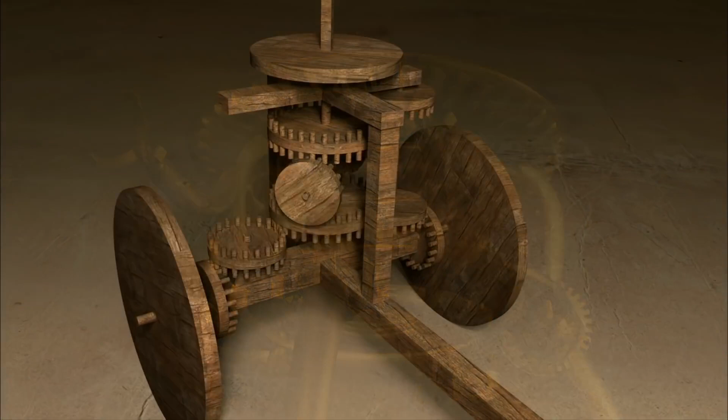Robots. The very word conjures up images of science fiction movies and visions of the future. But could the ancients have created automatic, programmable machines hundreds and even thousands of years ago? Full-size human replicants, animals that moved by themselves, sophisticated multi-action robotic chronometers over 50 feet high. Now, new evidence suggests that ancient androids may have been more reality than myth.

The most imposing legacies of the ancient world still stand today. But temples, palaces, and tombs of stone do not tell the full story of life hundreds and thousands of years ago. If we look deeper beneath the ruins, we find a world of extraordinary automated machines.

Although the ancients lacked electronics and computers, some of their automata were really surprisingly sophisticated and incorporated concepts like feedback control and programming. We are discovering that the ability to create programmable gadgets has been around for 2 millennia. There existed automated devices that were centuries ahead of their time.

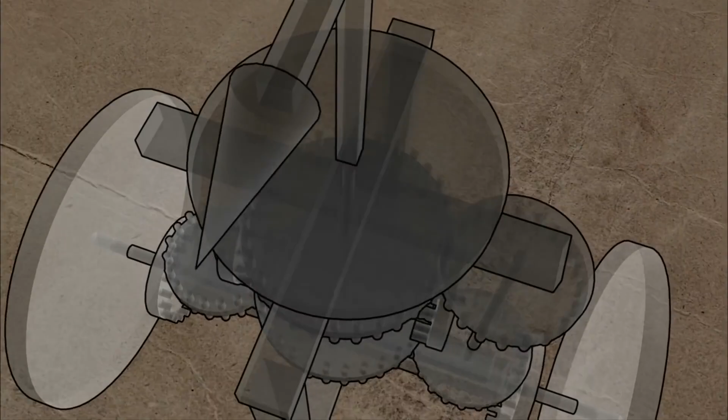And many of the breakthrough innovations gave birth to the science of robotics and to the technologies we still use in automated machines today. A lot of people think that robotics was invented at the beginning of the 20th century, but there were proto-robots around throughout the centuries for 2,000 years, and without those we wouldn't have any modern robots.

The human imagination has always dreamed of a future where we might interact with life-size human replicants. But unbelievably, this might not be a dream. Could it have happened hundreds of years ago?

Vinci is a small town nestled in the Italian hills. It might have remained an insignificant dot on the map were it not for one man, the town's most famous son, Leonardo da Vinci. Leonardo was a genius in his own time.

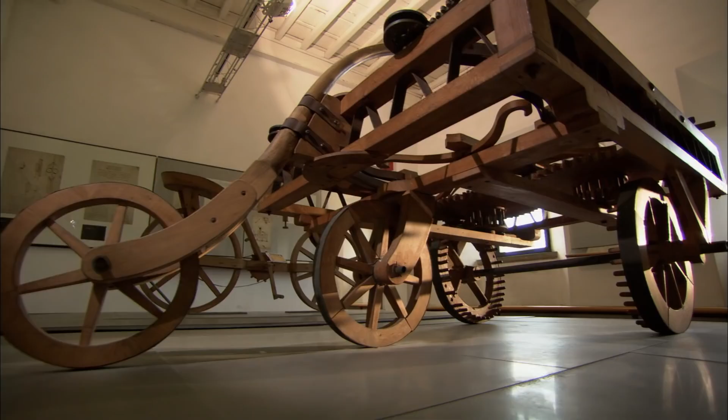He created some of the most amazing inventions one man has ever produced, and many of his concepts changed the world. The Leonardo Museum in Vinci contains models of some of the most important and fantastic inventions the world has ever seen.

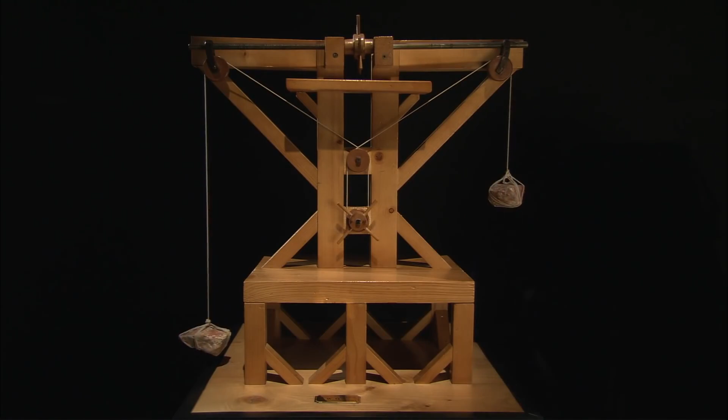Ingenious counterweight cranes, Leonardo's prototype helicopter, the first in history, strange and claw-like wing designs for futuristic flying machines, and large tanks with heavy defenses and mounted with powerful cannons 400 years before they were first used in battle. But the museum contains treasures far more valuable than the models of his creations.

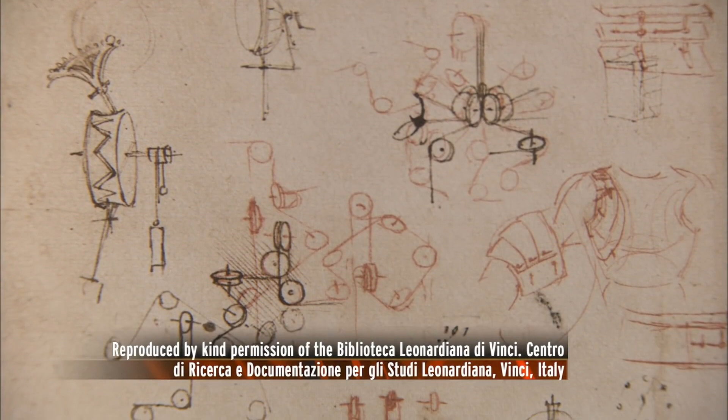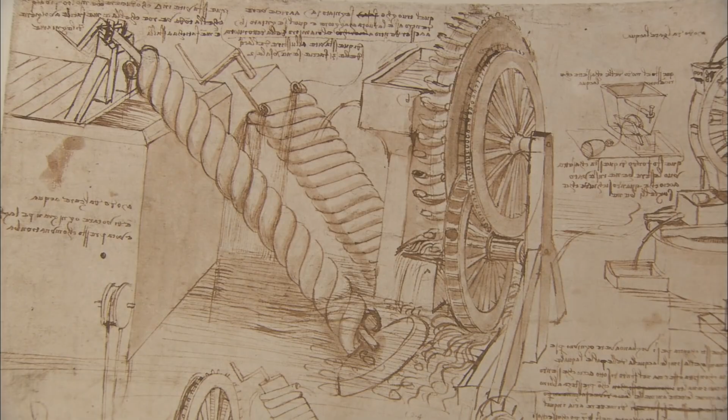The manuscripts that record the actual drawings and notes penned by the hand of Leonardo himself. The collection is known as the Codex Atlanticus. Contained within its pages are sketches and virtual blueprints for hundreds of Leonardo's inventions.

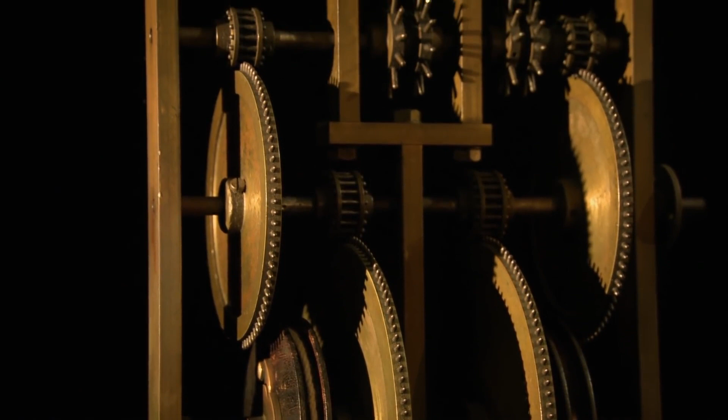Hidden among the pages of this text is an extraordinary find, one that challenges the history books. The pages describe in intriguing detail the inner workings of a fully automated android, made to look like a knight.

So now what it's left us with is having to be detectives. It's a bit like an archaeological dig. We have to go in, we have to look at the drawings over and over and over again.

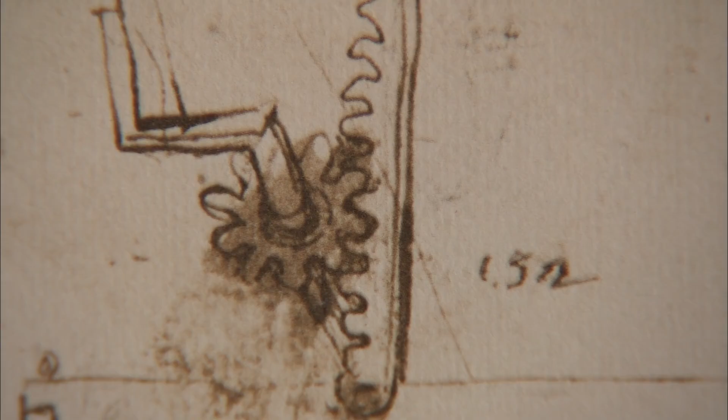Florence, Italy is where Leonardo did much of his work. Alessandra Romanelli is a curator at the Leonardo Museum in the city. It is here that robotics historians have actually reconstructed Leonardo's robot knight, based on sketches made by Leonardo himself 500 years ago. Leonardo dedicated himself to the project of an automaton, which is a humanoid machine.

Leonardo's android was designed based on an advanced knowledge of biomechanics, and that's the science of how our bodies move. He was all the time thinking about how could I make a machine that would be like a person? Leonardo's robot was designed to replicate human movement through metal.

Muscles, tendons, and ligaments were all first studied meticulously before their function was transformed into the robot's design. Leonardo thought of the human body as a wonderful, perfect machine, and he tried to create a mechanical model that could reproduce the effect of human movements.

Cogs in the chest of the robot were attached to axles that were wound with rope. As the key cogs rotated, the rope became unwound or wound tighter. The rope was attached to the limbs, and as the rope was pulled or released, the limb moved. It worked through the effect of tightening and loosening the ropes to simulate the traction and straining of limbs.

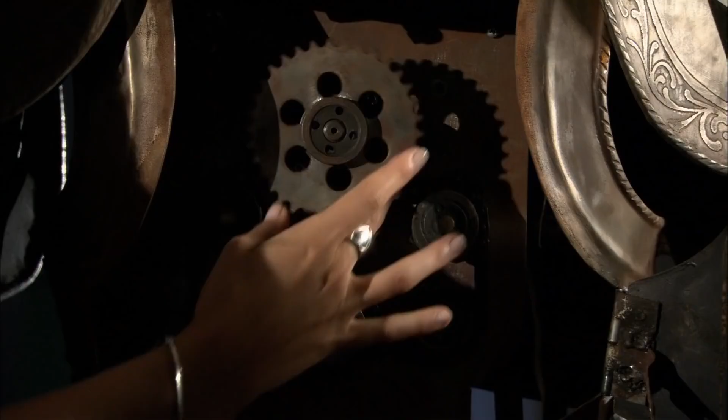Beneath the knight's armor, we can see the gears and ropes that turned to tighten and loosen the ropes attached to the arms. We can see the wheels in the robot's chest. The ropes were fed from the cogs in the chest, through the shoulder and all the way down the arms. The result was that the turning of a gear produced a movement in the limb.

This would be the movement of the arm. Put together, it produced a remarkably human result. So what the robot can do is hug someone. So they reckoned it went up to people and hugged them. The robot knight would have enthralled and entertained audiences wherever it went. But were there robots of the ancient world designed for more sinister and violent purposes?

The ancient Greeks lived in an age of myth and legends, a world populated by gods and monsters. But in ancient texts, there are stories of another kind of being - this one fully mechanical, stories of robot warriors.

Homer, the most famous of ancient poets and writer of the tale of Troy, tells us of the god Hephaestus, the Greek god of smelting and metalwork. He was the god of blacksmiths, the god of manufacturers. He was probably the first engineer ever on Earth.

Ancient texts say that Hephaestus lived high in the mountains of ancient Greece, and it was here he had his forge, where he smelted, beat, and created weapons, armor, and all things metal for the gods themselves. He was said to have produced countless ingenious mechanical devices, but intriguingly, Homer tells us that he also forged robots.

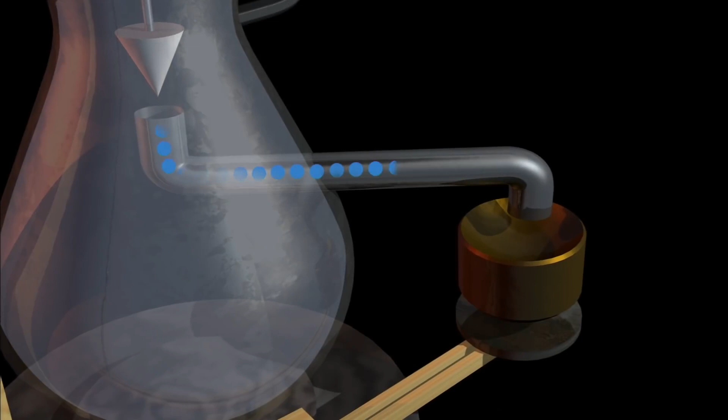When the weight is removed, the bar drops under gravity. This causes the connecting rod to drop, which lifts the valve, and the fluid can flow through the conical valve and out of the jug.

Now, because the cup is balanced by the weight at the rear, as soon as it reaches a predetermined point, dictated by that weight, the cup will then drop. That arm rises, the valve drops, cuts off the flow of liquid, and so that cycle of the process is finished. It's an absolutely fascinating design, and it's probably the first real genesis of control systems that we're aware of.

But what if a guest became carried away with the ingenuity of this technological achievement, or its wine contents? For people like these, Heron was a prankster.

This little invention proves that the ancient Greeks had both a sense of humour and a sense of mischief. It's called a greedy cup, and a host would present this to one of his guests who had perhaps a reputation for enjoying his cups.

And what would happen is that when the chalice, or kylix, was partially filled with wine, it would just act as a normal cup. As soon as the guest said, no, fill it up, top up the cup, the little siphon in the centre of the cup suddenly starts to operate, and the entire contents of the cup are dumped onto the person's lap, all over the clothes of the unsuspecting guest.

Hidden within the center column of the cup is a pipe with a bend. There is an opening to this pipe at the bottom of the cup. When the liquid in the cup reaches a level higher than the bend, air pressure forces the liquid through the tube, up and around and out of the cup.

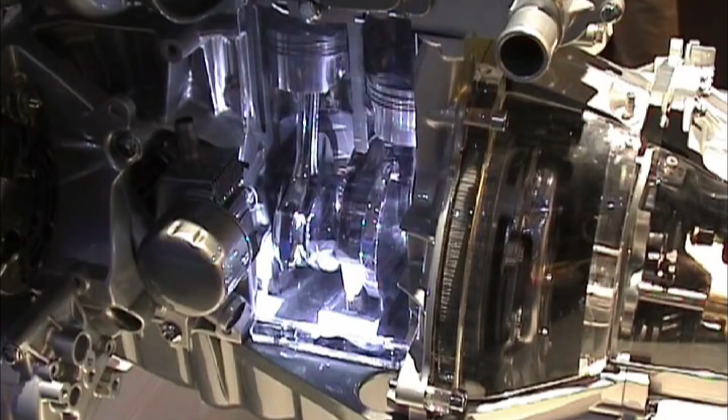This is how the piston's movement is converted to circular movement in the crankshaft of an engine. This exact principle is used in all engines, right up to the modern day. For all of Heron's brilliance, he had yet to design his masterpiece, an entire theater whose actors were robots.

The modern library of Alexandria is a stunning architectural achievement. But Alexandria was a hotbed of technological innovation over 2,000 years ago. And at the cutting edge of this new wave of ingenuity and innovation was a man called Heron.

Many of Heron's inventions had practical applications, but he also excelled in the art of creating mechanisms for entertainment. Mechanical technology was also used in the service of public entertainment. Ancient audiences became increasingly sophisticated, wanted more and more visual entertainment. One of Heron's biggest challenges was to create technologically advanced entertainment systems.

One idea he dreamed of was a theater with no actors, only robots. In Dublin, Ireland, robotics and automata designer Mick Kelly has created a replica of this incredible theater.

First they'll see the theatre with the doors closed, and then the doors will open for them, and they'll see little men on the back of the stage making ships, and then hands will start to move and they'll hammer and they'll saw. Backdrops fall into place, and actors and scenery move about the stage, all at exactly the right time. But how did Heron ensure that each event happened in the correct order?

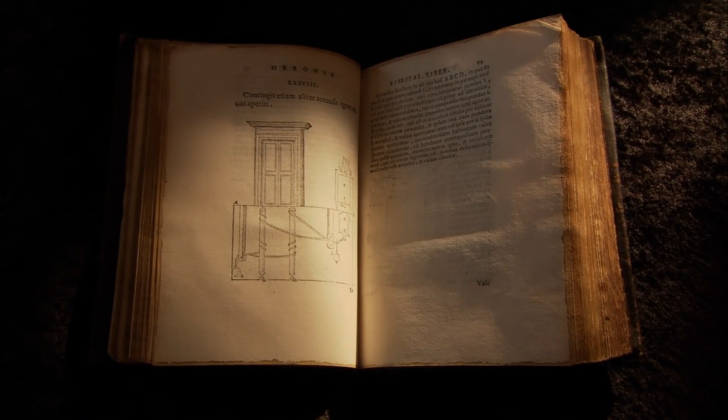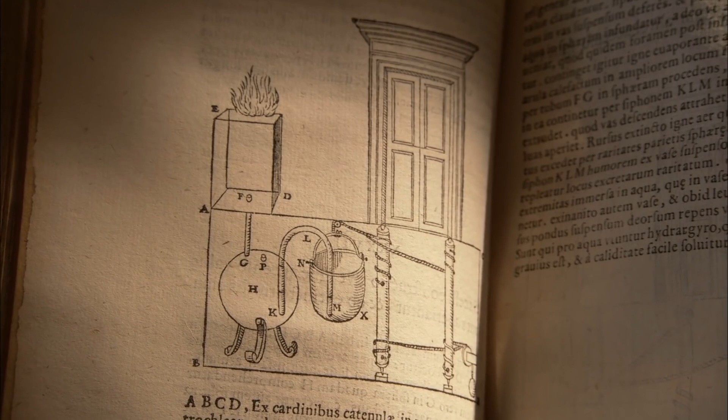There were two principles used by Heron in his automated machines. The first, used in machines like the theater, relied on weighted moving parts, ropes and wires and cams. But Heron invented a second breakthrough in automation, the world's first hydraulic systems.

One of Heron's favourite mechanisms appeared to be a device whereby air pressure is produced by water moving from one vessel into another. As the water runs into the vessel, the air is compressed and has to move somewhere, so it's usually piped to possibly a sound-producing or movement-producing device.

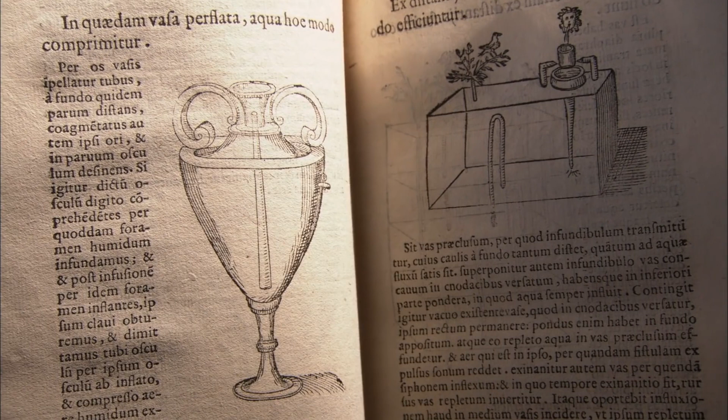Today, this technology is known to science as pneumatics. Pneumatics is all about the way in which air and gas move and how air and gas can be used to move things. Heron's books clearly show an understanding of the mechanics of air. He knew the air had substance, it had volume, it was made of particles, and if you pushed it, it would have to go somewhere, and if you sucked it, it would come with you.

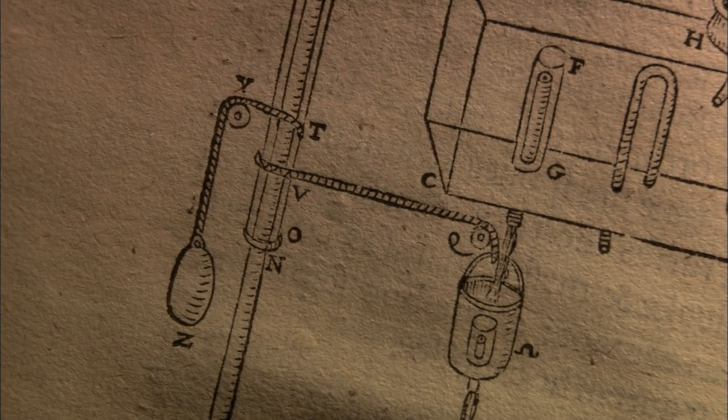But could Heron apply these theories to the real world? An opportunity arose when he was challenged to create a garden of birds that could move and sing in the total absence of humans, or birds.

We have reports from visitors to the Byzantine court of numerous mechanical devices, one of which was a tree which contained metallic singing birds. The model works on the basis of water falling from one vessel to another, displacing the air and blowing a series of small water warblers which are contained within the birds.

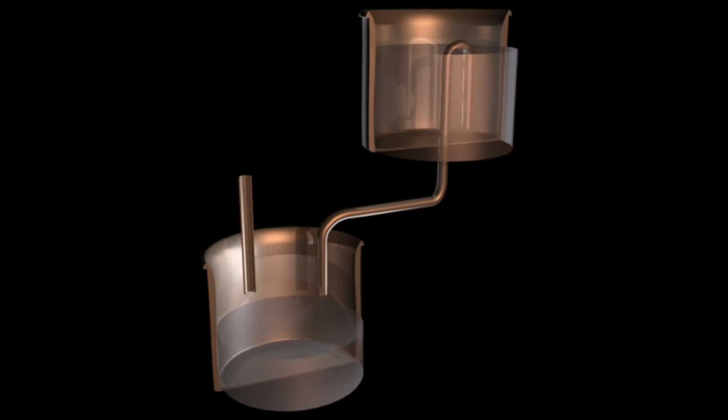The water enters the system through the lion's mouth and drops into a bowl. From there, it runs down into the next vessel below, which is a sealed container. So as the water rushes in, the air in the container is forced out, along the tubes and out of the mouths of the warblers, where there are whistles to make the noise. When that container becomes full, it then siphons suddenly into the lower container.

As that fills, the weight of that vessel actually operates the owl, which then turns to look at the birds. As that lower vessel fills up, it reaches a point almost to full and then siphons. The weight then decreases dramatically because the water's going out. The vessel then rises under the influence of the counterbalance weight, turning the owl back into its original position. This makes it a kind of loop system whereby it completes one cycle and then immediately resets itself and starts again. So as long as power is being supplied, the system will cycle continuously.

In a sense, this makes it perhaps a precursor of what we would now call a robotic machine. It would have amazed an audience who had never seen metal recreations of nature moving and making sounds independently of life.

The motivation behind most of these pieces was to create awe and a sense of mystery, and to accentuate the power, the wealth and the technical expertise of the culture.

Heron was a master engineer. He was a master craftsman. He made things happen. He saw the opportunity and he put it together to the limit of the fabrication methods available to them at the time. Heron was truly a giant in the field of early advances in robotics and automated machines.

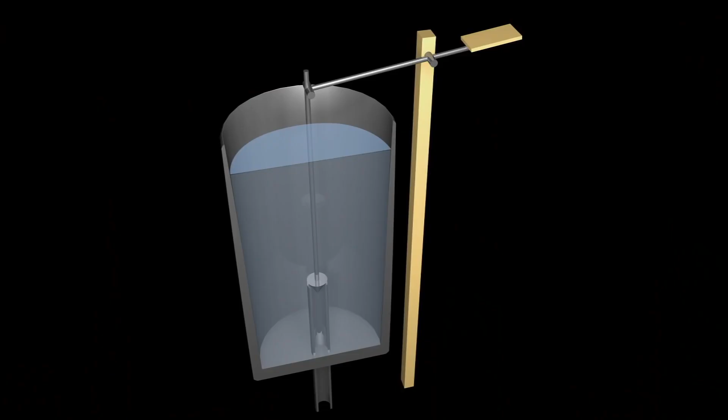This device is called Philon's automatic soap dispensing machine, and it works like this. On the side of the machine is a coin slot, which would have collected money from worshippers visiting the temple. The coin lands in a pan on one end of a lever. The weight causes this end to go down. The other end of the lever pulls upwards and releases a valve that allows water to flow. So when a coin was placed in there, a supply of water would be turned on.

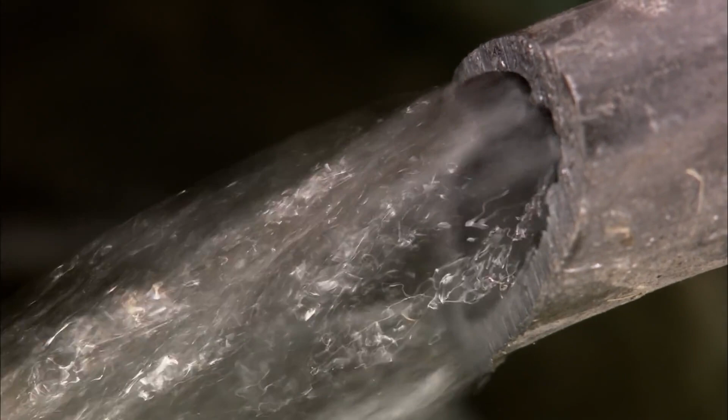As the vessel filled up, the weight of the vessel would act on a counterbalance shaft. The weight of the full pot turns wheels that are attached to strings. The strings pull open the doors to the machine and at the same time cause a hand to lower, which presents the worshipper with a ball of soap, or in this case, pumice. The hand returns to the interior of the machine and is automatically reloaded with soap.

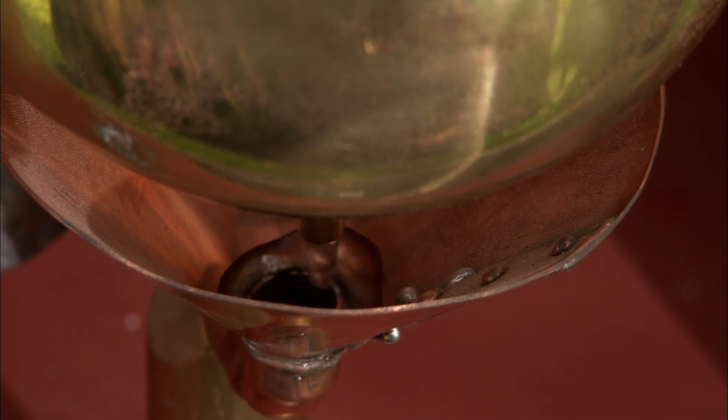After a few seconds, the vessel reaches its siphon point and it dumps the water in a fairly continuous stream for several seconds down through the device, through the pipe in the lion's mouth, thus allowing the worshipper to actually wash their hands using the pumice ball.

These examples of technology designed by Philon are some of the very earliest machines that we could truly call automatic. For a device which is something like 2,250 years old, this is just mind-blowing. It's a staggering achievement. The exact same principles of this machine still drive many of our machines today, nearly 2,250 years later. One could argue that this device was the forerunner of the modern soap dispensers that you find in washrooms. Philon, Heron, and others in the Alexandrian school created the world's prototype robots and automated machines.

Machines that self-regulate. Machines that always do the same thing time after time. And there was a special need for exactly this capability in ancient China.

The ancient Chinese were impressive long-range traders, map makers, and adventurers. But it was important to them that they always knew which was home, and especially in which direction lay the fabulous holy city and capital of their empire, Beijing. How could the ancient Chinese inventors solve the problem of always being sure in which direction lay their capital?

Ludo Verheyen of MTE Studios has reconstructed a full-scale model of this fascinating machine. This project was indeed quite a challenge. It was the first time that these features have been reconstructed ever, and the mechanics involved was really a challenge.

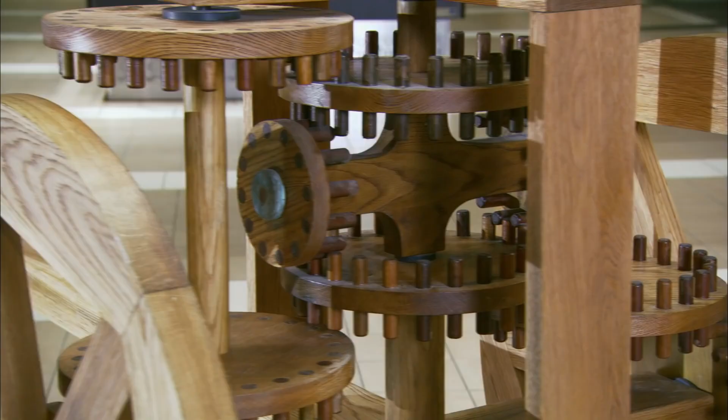As Ludo rotates the device, we can see that the statue on top always points the same way, whichever way the chariot turns. But how does it work? It's a highly sophisticated geared mechanism, very similar to the device found in almost every modern car, which we would now call a differential gear.

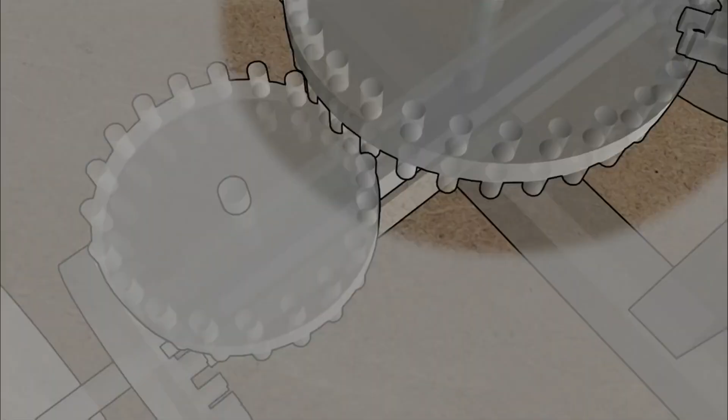The gearbox effectively measures the speed between two wheels. As one wheel moves faster than the other, as it does when turning a corner, it alters the position of the figure mounted above the chariot. When the cart turns, the right-hand wheel turns a cog inside the machine, which turns the central gear that rotates the figure. Because the right-hand gear has rotated more than the left, the figure is turned more toward the left.

So as the cart turns right, the figure turns left to compensate. The result is that the pointing statue seems not to have turned at all, and always points in the same direction.

No matter where the chariot moves, however it twists and turns, the figure should always remain pointing in the same direction. All the Chinese travelers would have to do is orientate the statue on departure, and it would remain pointing in that direction for the entire duration of the journey.

To all intents and purposes, I think it would be fair to claim that this is a robotic device. It was an incredibly important invention and has had a huge impact on the technology of the last 100 years in particular. But there is intriguing evidence that the ancients designed machines that could perform several actions all at the same time. Could the world's first supercomputer have been designed almost 1,000 years ago?

The science of robotics was surprisingly advanced in the ancient world. But how were their machines powered? If you go back 2,000 years, they didn't have batteries, they didn't have electrical outlets, and this was a real problem for them. One of the most reliable sources of energy in the ancient world was water.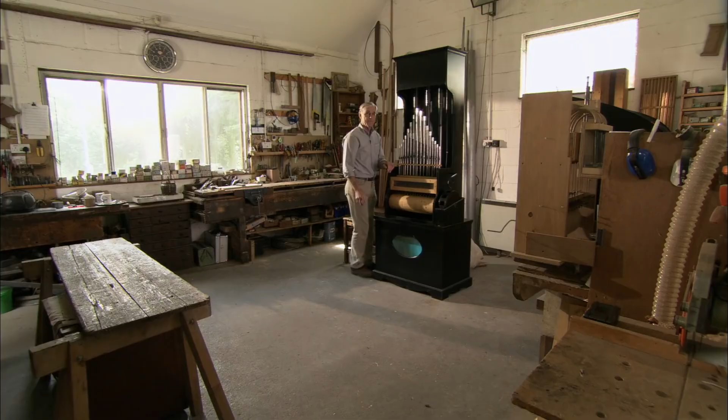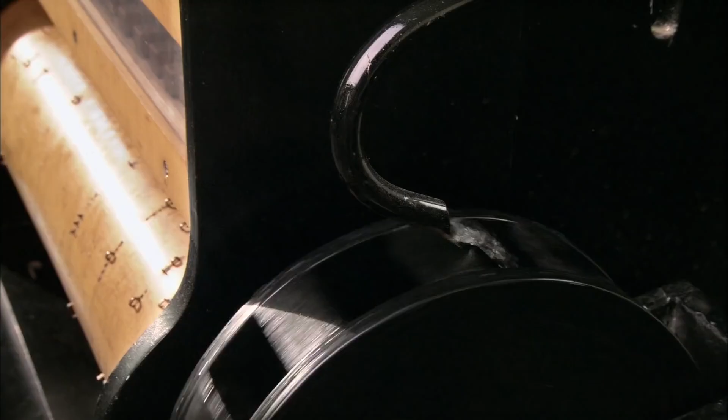Let's try it. In ancient times, they would have used a waterfall. Today, we are simulating the effect of water falling under gravity using an electric pump. The water is now entering the top chamber and falling down into the system below to create the air, and it's now turning the wheel and making the music, just as it would have done thousands of years ago. Pins on the rotating drum lift levers that open the valves and allow the air into the pipes.

But there was a machine in the ancient world that used water not for power, where water was the central part of the mechanics itself.

At the temple in Karnak, an intriguing find was discovered during a major excavation. They came upon a huge cache of statues that had been buried at some point in antiquity. And among these statues was a very interesting artifact: an alabaster jar dated by inscription to the reign of Amenhotep III, about 3,000 years ago.

Although this incredibly ancient find may look like a simple container, it would be useless for storing any liquids. The pot has a built-in leak. Water would be put into the jar and would flow out at a controlled rate, and this served as a timing device. Small holes down the sides of the urn indicate how much water has escaped. All the priest would have to do is examine how full the pot was, and they could tell how much time had passed since the clock was filled. It is the ancient world's first water clock.

But is there evidence from the ancient world of technically advanced clocks that kept time permanently? Clocks that were fully automated.

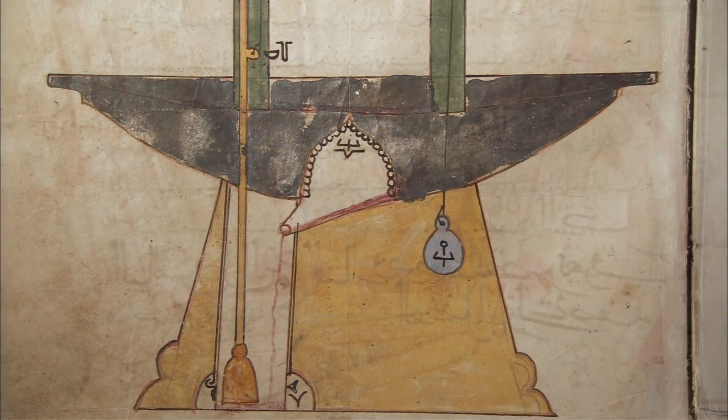The search begins in the 400-year-old library of St. John's College in Oxford, England. Here, there are writings that are over 1,000 years old.

Dr. Emilie Savage-Smith from the Oxford University Department of Oriental Studies is researching an ancient inventor, robotics engineer, and clockmaker. His name is Al-Jazari.

Al-Jazari, in 1206, composed a treatise on ingenious mechanical devices, in which he described roughly 50 devices in great detail. The Topkapi Library in Istanbul, Turkey, amazingly still contains copies of this ancient manuscript. Within its pages are contained some of the most important breakthroughs in engineering the world has ever known, written by Al-Jazari himself. He's important because his is the only treatise that we have preserved today that does this.

Al-Jazari was part of a new wave of Middle Eastern inventors who understood the importance of the Alexandrian proto-robot designers that had come before. They had obviously read Heron of Alexandria, and we know that it was translated in Baghdad at that time. Building on the innovations of the Alexandrians, Al-Jazari created one of the ancient world's most complex and impressive automated machines, designed to keep time.

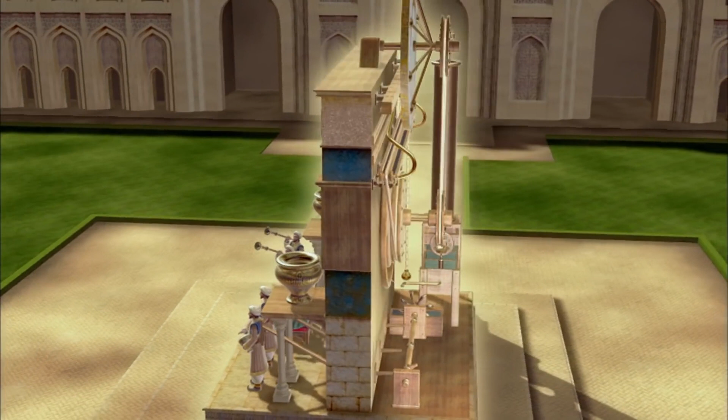In the Ibn Battuta Mall in Dubai, ancient historians have created a model of this impressive machine. It is known as the castle clock. At regular intervals throughout the day, the clock performs certain specific actions. Signs of the zodiac rotate around the top of the clock. A moon travels along the top, opening doors to show the passing hours. Falcons drop a ball every half an hour, and every hour, the robot musicians play. Behind the clock, we can see the ingenious arrangement of mechanics that drive this sophisticated series of events.

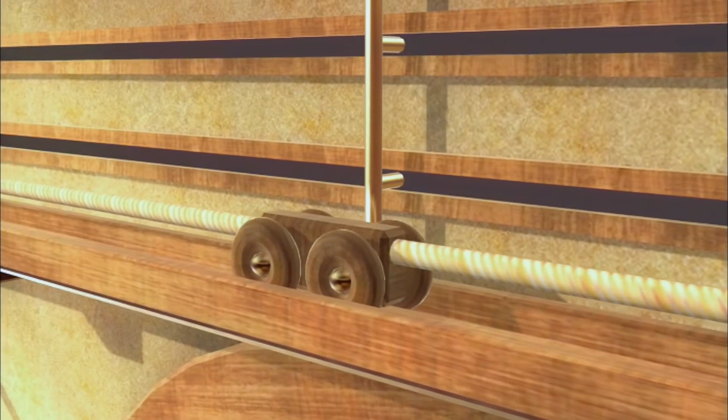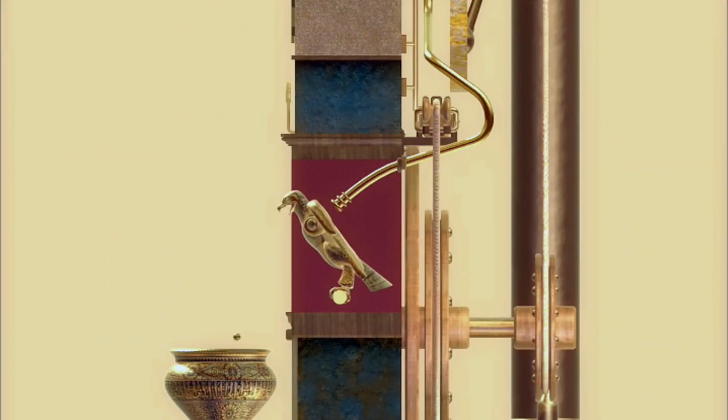Water drains out of a vertical tube under gravity. In this barrel is a float that lowers with the height of the water. This pulls a rope which rotates the disc, giving the signs of the zodiac. This rope also pulls a trolley to which is attached the crescent moon, which moves along the front. Rods on the trolley activate the opening of the doors exactly as the moon passes. As the trolley passes set points, it releases balls that run down a tube and out of a falcon's mouth into the bowl. Meanwhile, the water that was draining from the vertical tube runs into a basin.

When this reaches its siphon point, it rushes out past a water wheel. This water wheel is attached to a camshaft. Cams on the shaft knock on levers attached to the musicians at the front, who move and play. Amazingly, it was said that the clock kept very accurate time, hundreds of years before clockwork and the harnessing of electricity or the use of servos. But there is an even more intriguing element of the clock.

In the medieval Islamic world, the day was divided into 12 hours between sunrise and sunset. This meant, as the days got longer in summer or shorter in winter, the clock would have to be reprogrammed to a different length of hour. This would be done every day, making Al-Jazari's castle clock truly one of the world's first programmable analog computers.

Al-Jazari can be regarded as the person who invented the first robot. Yet for all of the advancement of the ancients, there remains one amazing invention that stands apart: a fully automated, self-propelled, ancient programmable robot.

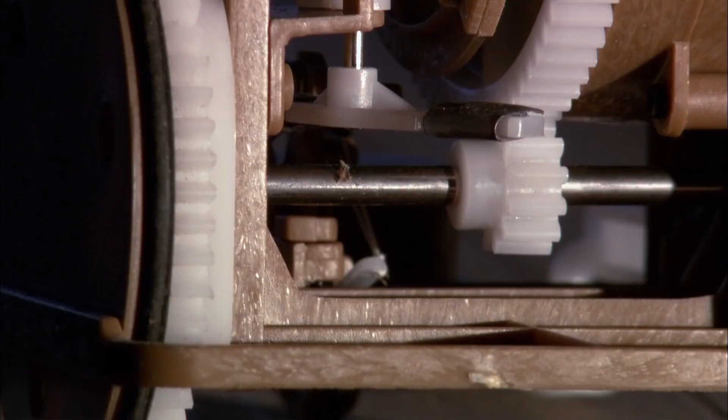This ancient android is powered by a coiled spring that is wound by the operator, exactly the same way we might wind a watch or clock today. This spring drives a large central cog. The central cog is connected to several other smaller cogs, each with their own function. It is the complicated and sophisticated interaction of these smaller cogs that produces the range of movements that the girl performs—an amazing achievement hundreds of years before the complex machines of the European Industrial Revolution.

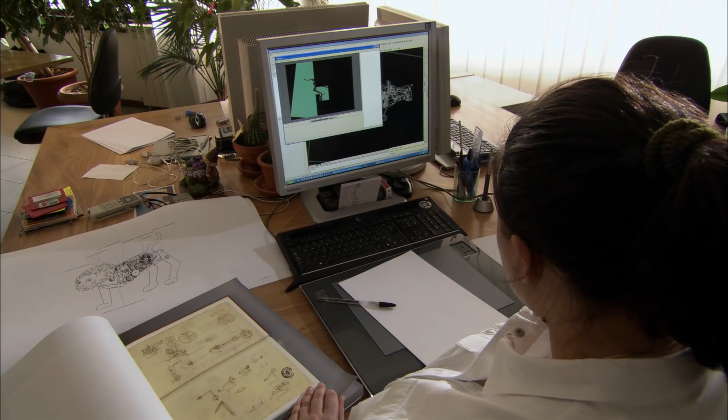We should not be surprised that the ancients had robotic technology. They were not fools. They had mechanism, they had power, they had vision. But the serving girl always repeats the same moves. To really see a self-propelled automatic programmable robot, we must turn to the most famous inventor in history, Leonardo da Vinci. Could Leonardo really have created a self-propelled, fully programmable robot?

Ancient texts tell us that 500 years ago, during an official ceremony, Leonardo presented a stunning gift to the King of France. We know for sure the King witnessed the robot because it was a big celebration. As onlookers watched in amazement, a lion walked with no wires or any help or interaction across the floor of the throne room, came out to the King of France, opened its chest, and gave him flowers. Everybody was stunned.

Today, using modern technological research, might it be possible to reconstruct Leonardo's lion? The challenge is monumental. Leonardo's blueprints of the robot lion have been lost to history. After Leonardo died, his manuscripts got spread everywhere. Lots of them got lost, about two-thirds of them, and lots of others got cut up and put into different pages.

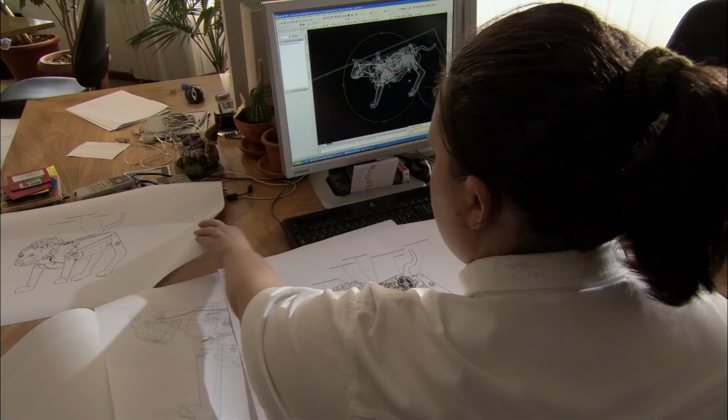At a robot laboratory in Florence, Italy, Leonardo robot expert Laura Stiatesi works with the latest in computer modeling software. The biggest problem was to produce a lion that had a range of movements, but furthermore, that all these movements would be powered by springs, without the aid of any motor or electrical input whatsoever.

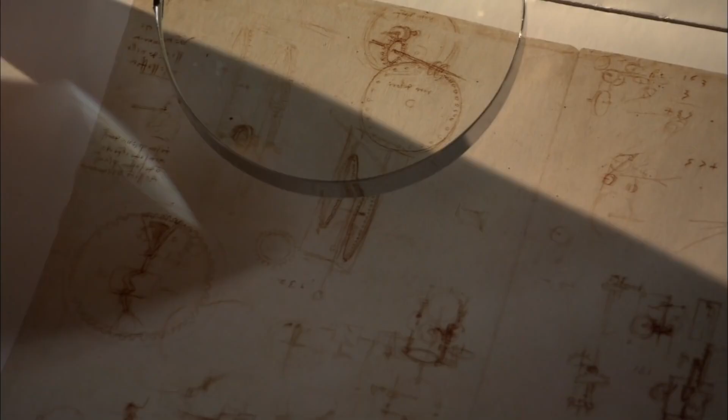Also on the team is ancient robotics expert Luca Garai. In a 300-year-old library in Bologna, Italy, Luca is trying to piece together the clues in Leonardo's sketches and discover the mechanisms within the lion that made it programmable.

The first person to actually program mechanisms was Leonardo during the Renaissance. He drew on some ideas from the Arabs, and maybe the Chinese via the Arabs, but he was the very first to actually create a programmable machine.

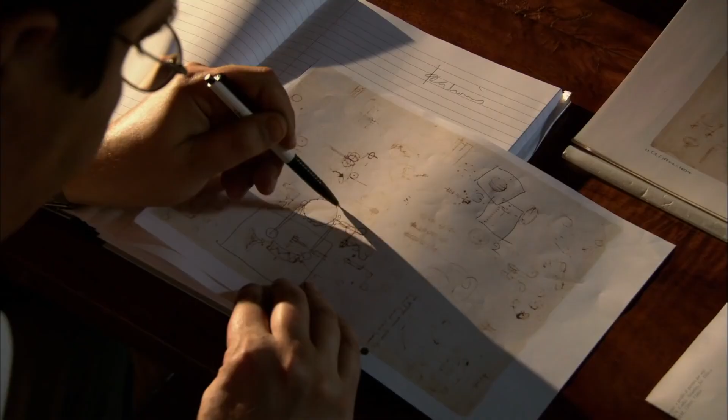The historians will have to search through the remnants of what evidence Leonardo left us and use all their powers of deduction. Might robotics specialists, historians, and model makers be able to decode the sketches in the Codex Atlanticus, to recreate the first fully automated programmable ancient robot using only ideas set out by Leonardo himself?

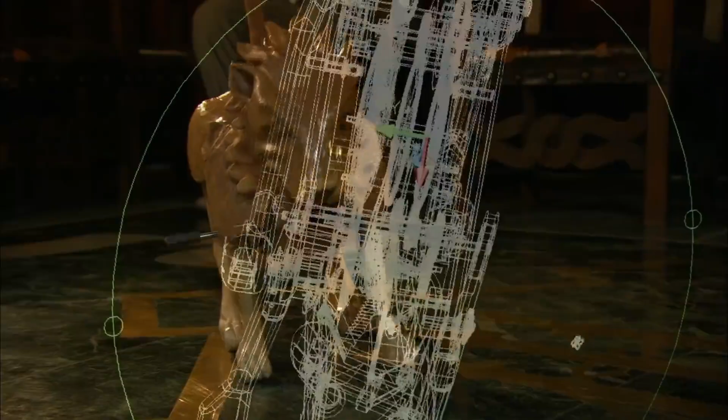We were very determined not to use any modern technologies or to take any shortcuts that were not available back then. Using only technologies understood by Leonardo, the researchers create this beautiful reconstruction, a complete replica of the world's first ever fully programmable robot. Moving under its own power, this replica of an ancient robot lion walks across the floor, exactly as it had when Leonardo presented it over 500 years ago.

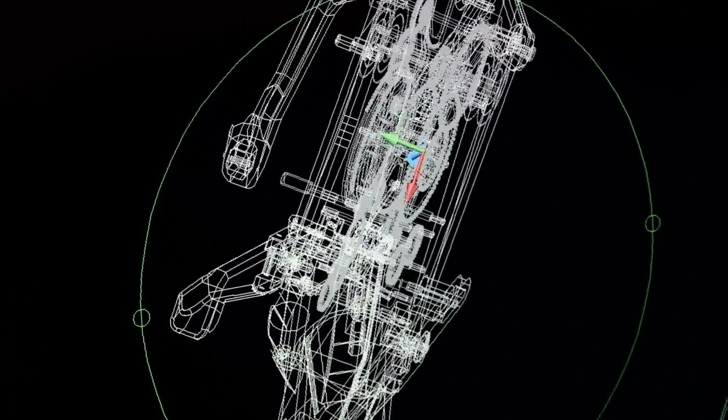But how did the researchers ensure that the lion would perform its functions correctly and in time? The researchers discover that all the lion's functions are driven by a central drum. This gets its motive power from a coiled spring that must be wound up. This component drives several hundred individual cogs, each with its own function. One group might move the head, another the chest, but how would they set the timings of each function?

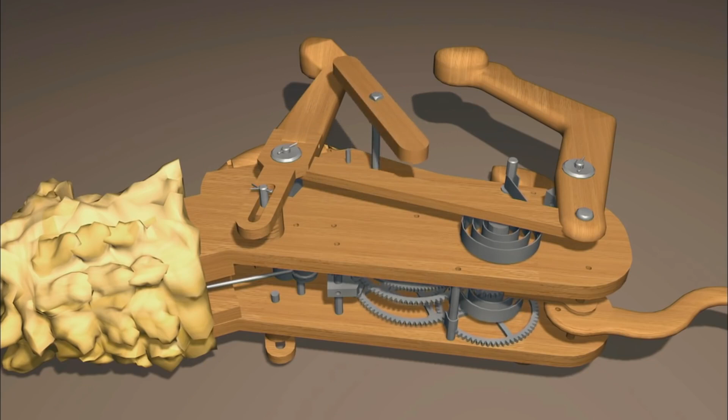Leonardo would have employed a technique known as gear ratios that is still used in modern machines today. For every turn of the main drive, other cogs turn faster, depending on their size. A cog half the size turns twice as fast. By programming the ratios between the large central cog and all the others, the operator would be able to set how many turns each cog made in relation to another. This would enable them to set the timing of each individual action and program the movement of the lion, exactly as Leonardo would have done 500 years ago.

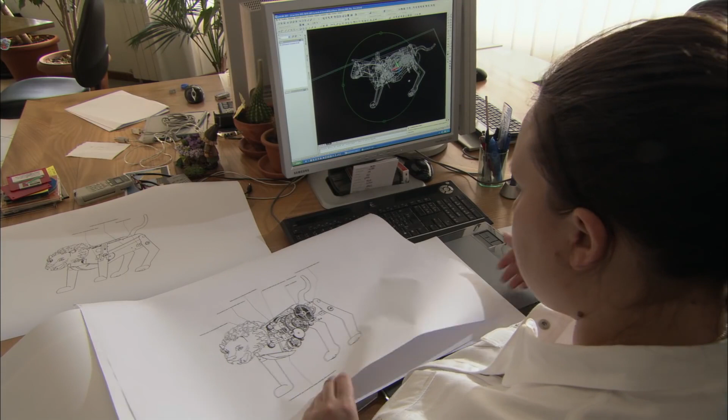The feelings that everyone who worked on the project had were similar to what it must be like for a mother to see her child walk for the first time. The satisfaction of seeing a machine powered by its own internal mechanics, with no auxiliary power, petrol, or electricity, was incredible.

It is amazing to think that before batteries, electronic power sources, and computers, the ancients were creating programmable robots at this level of sophistication. I'm really impressed by the incredible skill of the early people. I mean, they did the real development.

From the proto-robots of Alexandria to the technological wizardry of Leonardo da Vinci, we are finally understanding the history of robotics. The genesis of machines goes way back, at least 2,000 years, to the Greeks, and probably a lot longer with the Chinese. We have really precise engineering, but we wouldn't have that precise engineering without the crude engineering prototypes that were created by the geniuses of the past.

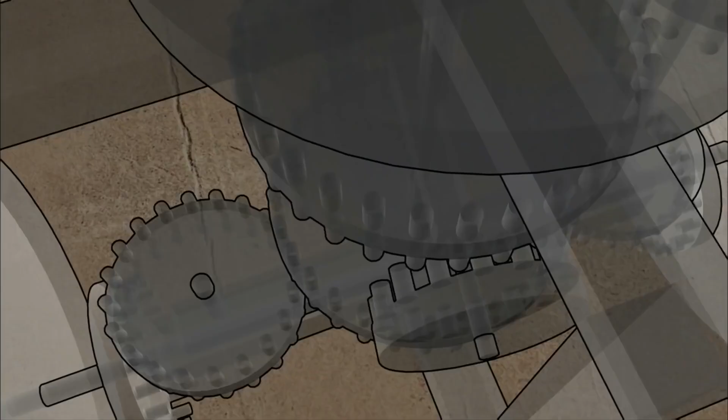Today, we believe that we invented the machines that power our way of life. But is that true? Hydraulics, advanced machines, and the world's first androids were all part of everyday life in the ancient world. What still remains to be discovered, and what we will have to one day acknowledge, is that our claims to invention are thousands of years too late.